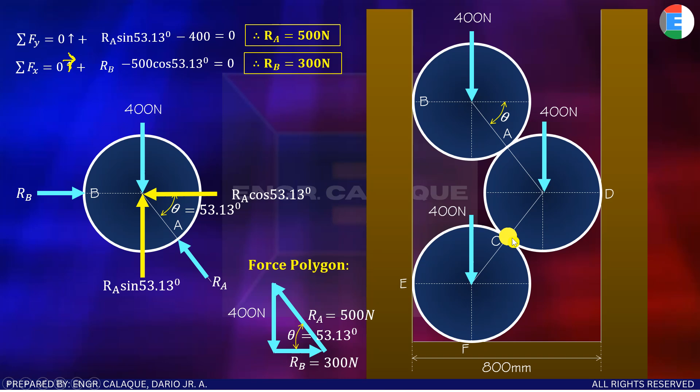So para ma-solve mo yung RF, need mo ng reaction dito sa point C. So para makuha mo yung point C, need mong i-isolate itong cylinder na to. So gawa natin ng free body diagram yan.

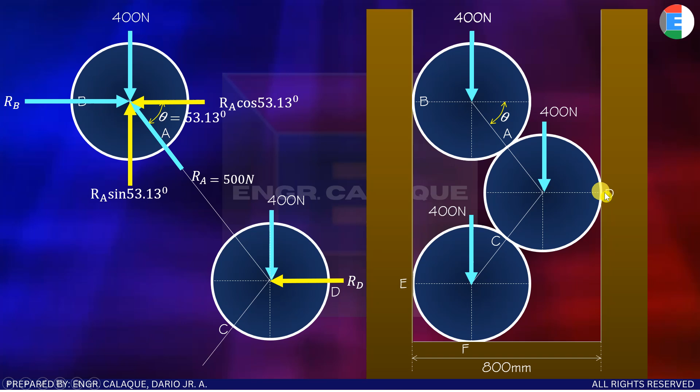Okay? So bali ito yan. Ito yan, ha. So ngayon, meron ka ditong RD, di ba? Kasi may contact yung wall tsaka itong cylinder. So meron tayong reaction acting diyan. Aside from that, meron ka ditong contact, dito sa point C, so may reaction din dyan. Meron ka namang RC dito.

So again, meron tayong mga theta dyan. So yung RC, pwede nating gawing X and Y component yan. Kumbaga, yung RC in terms of Y, that would be RC sine 53.13. And then for the X-axis naman, yung X component niya, that would be RC cosine ng 53.13.

So for the reaction at A, okay, pwede natin tagalin yung reaction kasi ginawa natin yung component na. Dito naman sa reaction sa A, meron kang 500, ba? So meaning, in terms of X, that would be 500 cosine of 53.13. In terms of Y naman, meron kang 500 sine 53.13. Okay, gawin na. So ganun lang. Parang ganito na.

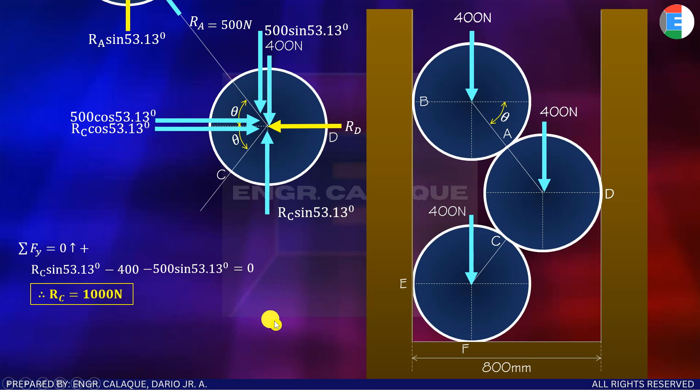So if you have this one na, pwede na tayo mag-summation of forces along Y, so we can calculate the value of RC. Okay, yung RC sine 53.13 minus yung 400 minus itong 500 sine 53.13. So wala tayong ibang force acting downward, so pwede na tayo mag-equal to 0. And then we can now calculate the value of RC using our calculator. So yung makuha nating sagot is 1,000 Newton. Okay? So ganun lang naman na.

Pwede rin ganito na. Pwede mong i-isolate yung dalawang cylinder. Na? So pag i-isolate mo yung dalawang cylinder, hindi mo ma-expose yung force or yung reaction dito sa point A. So parang ganito ba? Pwede mong i-isolate to. So may expose mo yun dito, may reaction ka. Ganun din dito, may reaction ka. Pero yung dito, may reaction dito pero kasi hindi mo parang isang isang system lang to sila.

So ang ma-expose mo lang na force is yung reaction dito sa point C. Okay? So pwede natin i-extend yan. Ayan. So ito na yun ha. So kung kuha na natin ng component, so ganun pa rin, meron tayong theta dito. So parang ito lang man din yan, di ba? Ito yan siya. So ito yung theta mo. So kunin ko na lang to.

So meron ko dito ang RC sine 53.13, tsaka yung ito, RC cosine 53.13. So ngayon, pag mag-summation of forces along Y tayo dito, so yung forces going up lang naman is yung first, yung RC sine 53.13, tsaka itong dalawang 400 na to. Di ba? The rest, horizontal. So pwede na tayo mag-equal to 0 kasi wala tayong ibang force acting dyan sa Y.

Okay, using our calculator, let's solve the value of RC, which is 800 divided by sine 53.13. So the answer is the same.

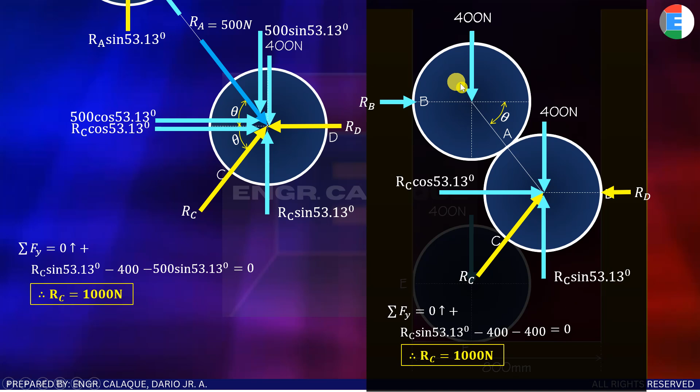So now we have the value for RC. We can extend that, considering the bottom cylinder. Let's make a free body diagram for it. The forces acting are RC, the reaction at E, and the reaction at F, since they have contact points.

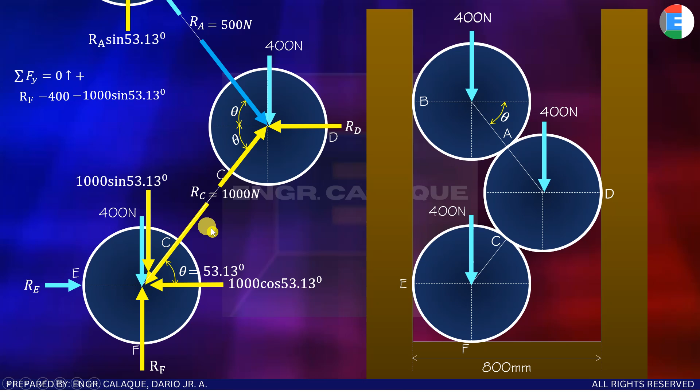The rest are all along the x-axis, so we can set this equal to 0. Thus, our RF is 1,199.999 - let's just say 1,200 Newtons.

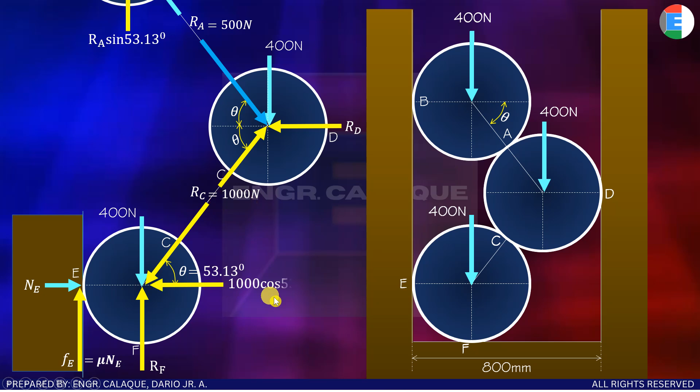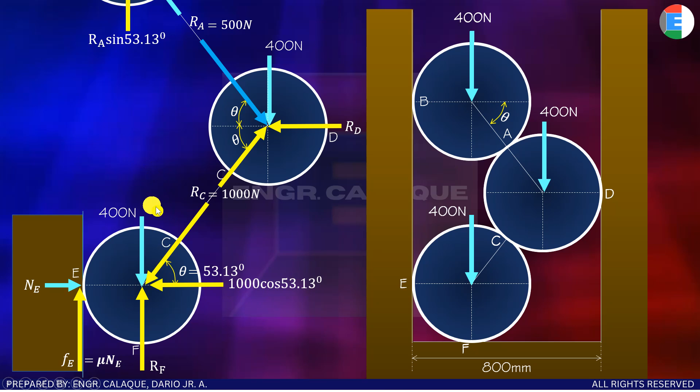Because you'll get the component of 1,000 in terms of X, which would be 1,000 cosine 53.13. Then there's no other force acting along X besides this. So NE is just 1,000 cosine 53.13. Anyway, I took the vertical component too, but I'll just use summation of forces along X.

So NE minus 1,000 cosine 53.13 equals 0. Thus our NE is 600 Newtons. Once you have the value of NE, we know the given coefficient of friction is 0.15. So using the friction formula, 0.15 times 600 equals 90 Newtons. That's the answer.

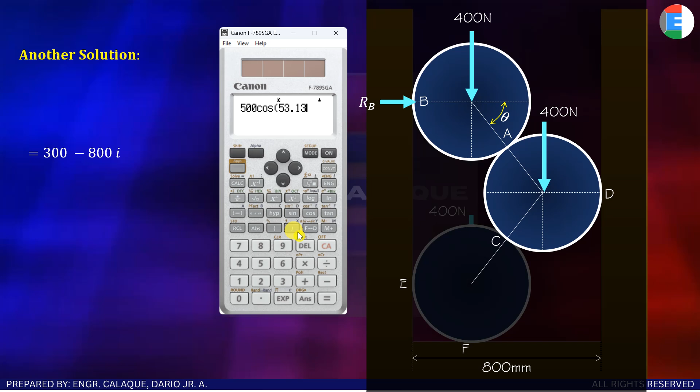500. So cosine of that, that's for RB. So 300 - RB is 300 Newtons.

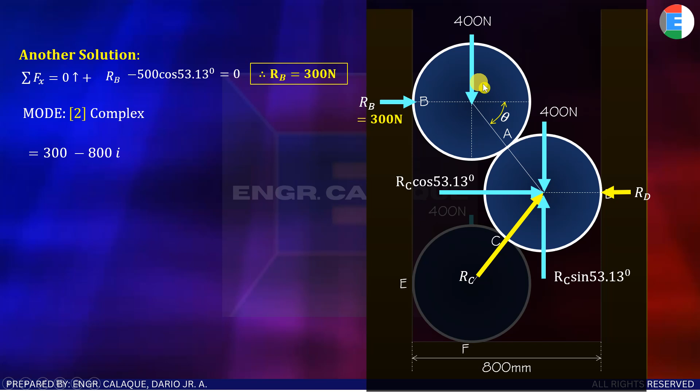After this, you can go to complex mode on the calculator. In complex mode, first let's model the 400. For the angle, it's always with respect to the positive x-axis. So that would be 400 angle 270 degrees. Now this RB...